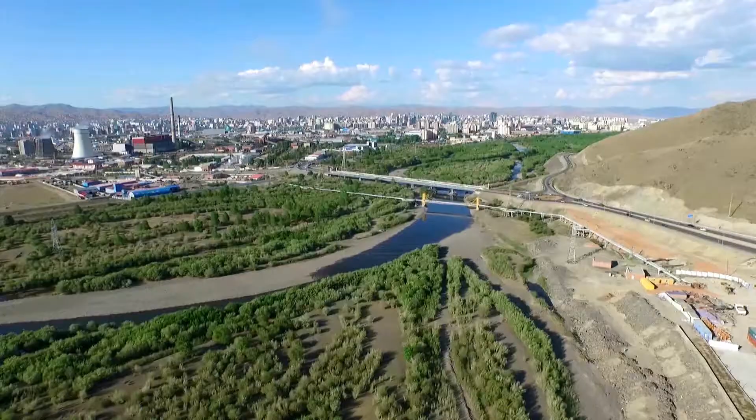There are over 20,000 enterprises and industries in Mongolia's capital Ulaanbaatar, the largest and most thoroughly developed place in Mongolia, as well as a population of more than 1.35 million. The Water Supply and Sewerage Authority of Ulaanbaatar is responsible for the constant supply of drinking water.

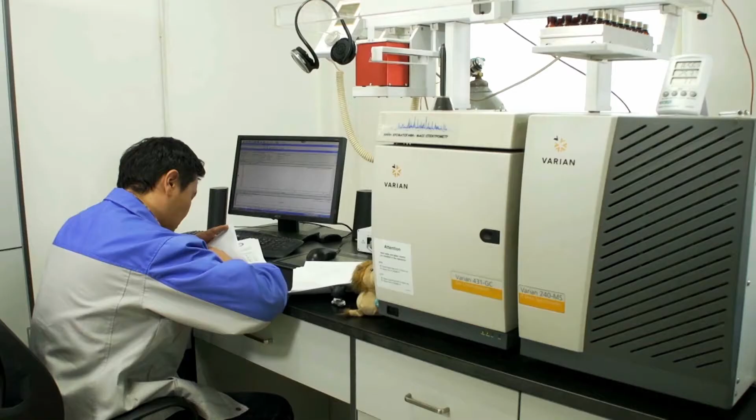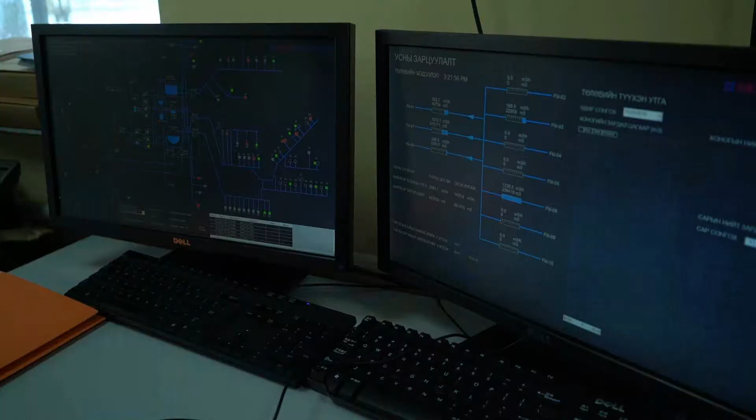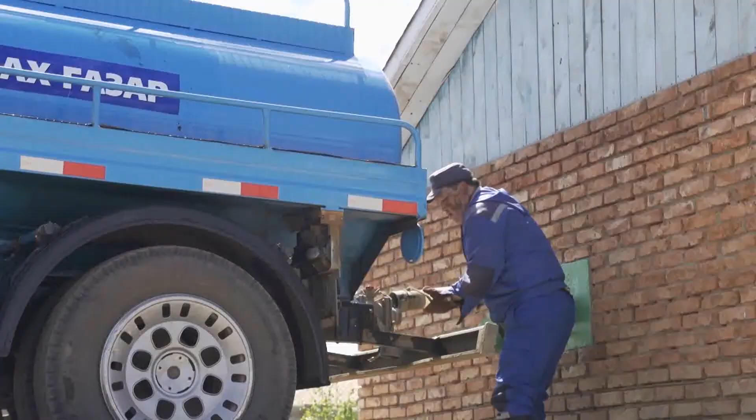The station pumped a total of 146,798 cubic meters. Alongside the Board of Directors, our activities are supported through the following structure: Director, Deputy Director and Chief Engineer, Deputy Director of Customer Service, Engineering Policy Department, Emergency Service Department, Technical Monitoring Department, Call Center, Customer Service, Contract and Monitoring Department, Economic, Finance and Accounting Department, Administration and Management Department, Investment and Procurement Department, Water Supply Utilization Division, Maintenance Division, Water Laboratory, Customer Service Division, Water Supply Pipeline Division, Water Supply Transportable Division, Water Transportation Auto Garage, Wastewater Treatment Plant Utilization Division, Industrial Wastewater Treatment Plant.

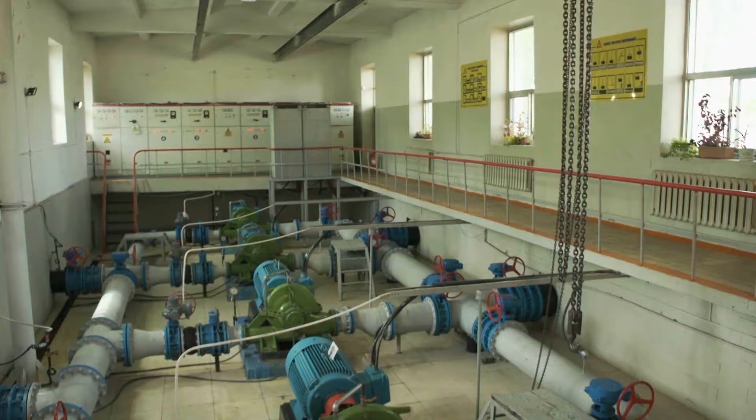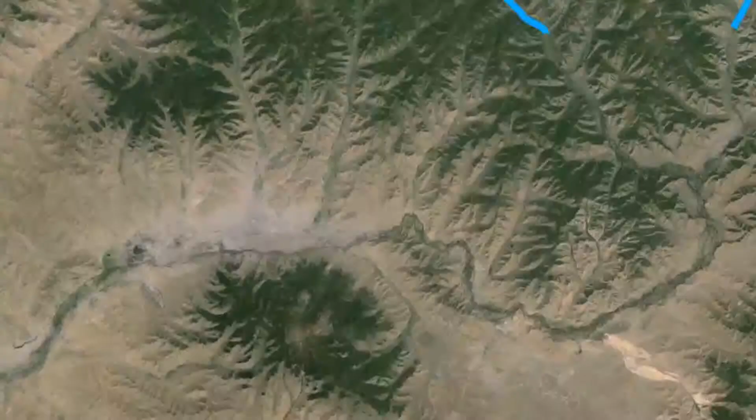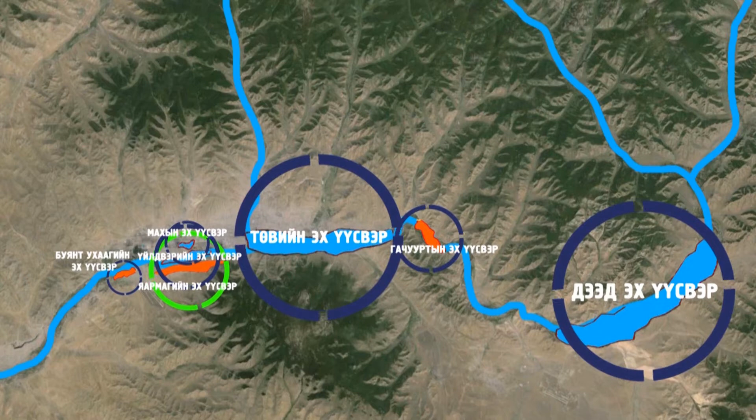The drinking and sanitation water for the populace of Ulaanbaatar is supplied by 7 main sources. These are the upper water source, the Gachuurt water source, the central water source, the meat water source, the industry water source, the Yarmag water source, and the Buyant Ukhaa water source.

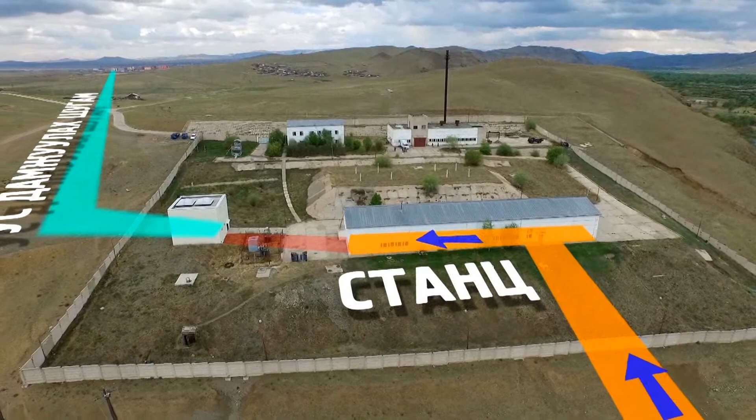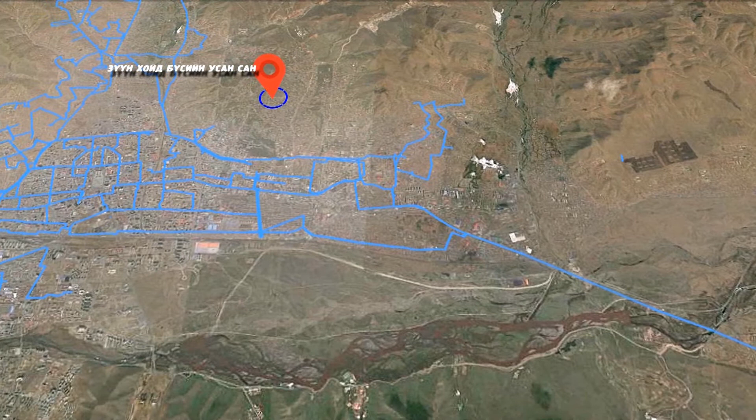Also, drinking and sanitation water is transported to customers in apartment and housing areas from 5 water reservoirs, namely the Zavsar, Northeast Zone, Tasgan, 3rd and 4th Region, and 21st Region reservoirs.

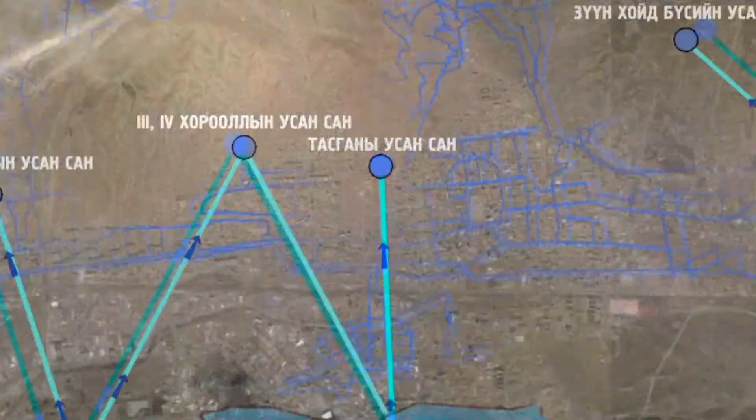Following the installation of water meters in all apartments from 2010, water consumption per person went down from 263.1 litres to 167 litres per day.

For the 60% of Ulaanbaatar's population that is accounted for by those living in the Ger districts, drinking water is provided by transported water stations and water lines.

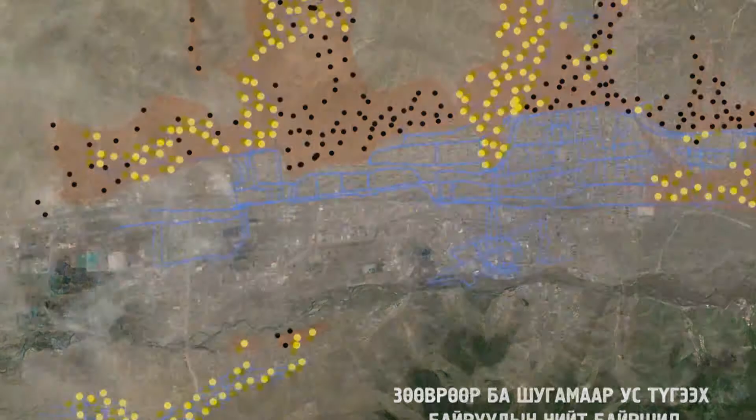57 water trucks bring drinking water to 278 water stations, servicing 226,433 customers.

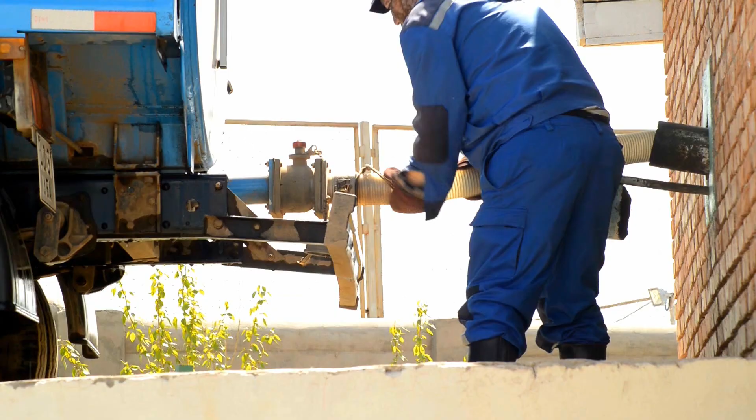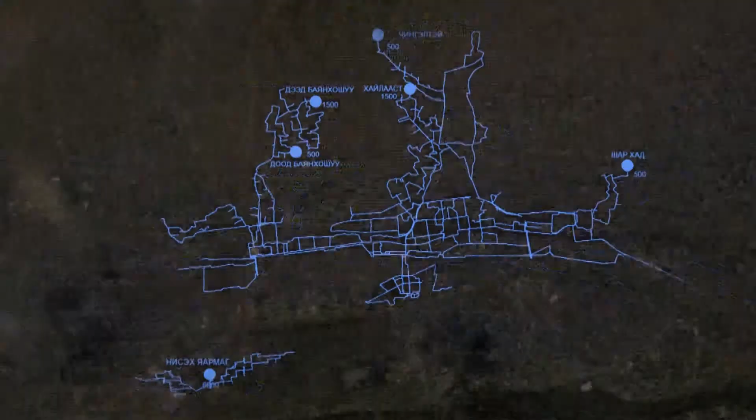In addition to this service, 240,394 customers in the Ger districts receive their water from the 318 water stations that are connected with water lines. Moreover, Chingeltei, Khailaast, Upper Bayankhoshuu, Lower Bayankhoshuu, Nisekh Yarmag reservoirs are sub-sources for 318 water-lined water stations.

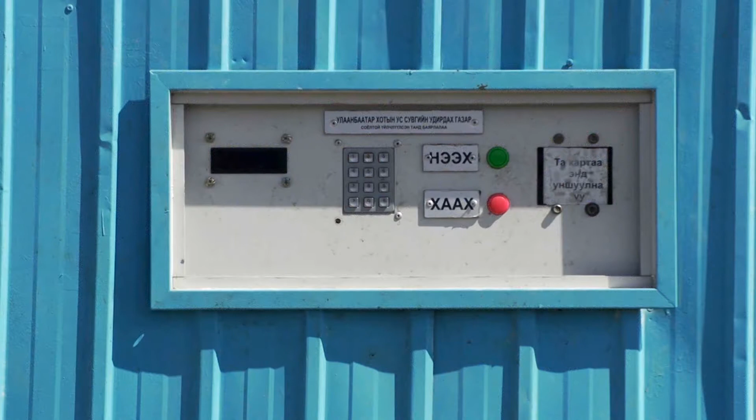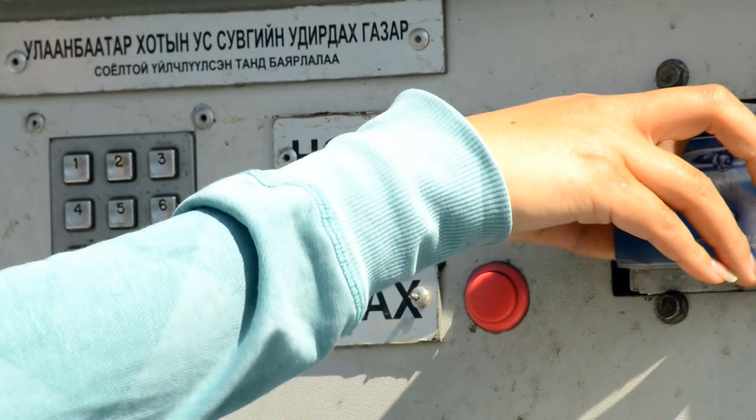According with the Smart Ulaanbaatar program, we have begun to establish smart water stations in order to support customers' water usage and maintain the continuous flow of water 24 hours a day.

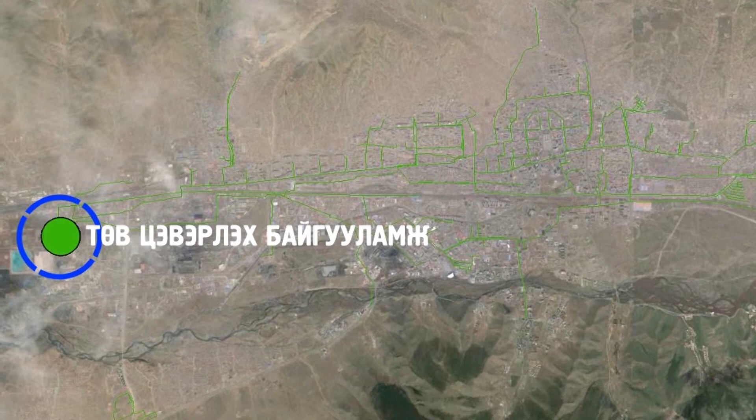The wastewater of Ulaanbaatar, comprising 150 to 160,000 cubic meters per day from apartments, Ger districts, enterprises and industries, is received through a 250-kilometer-long sewerage system to the central wastewater treatment plant of Ulaanbaatar.

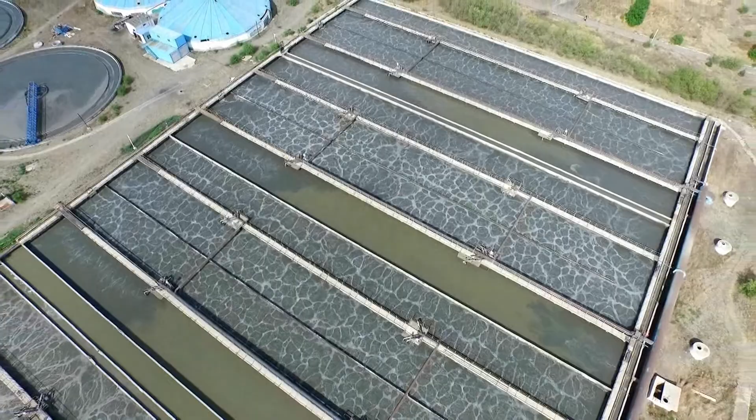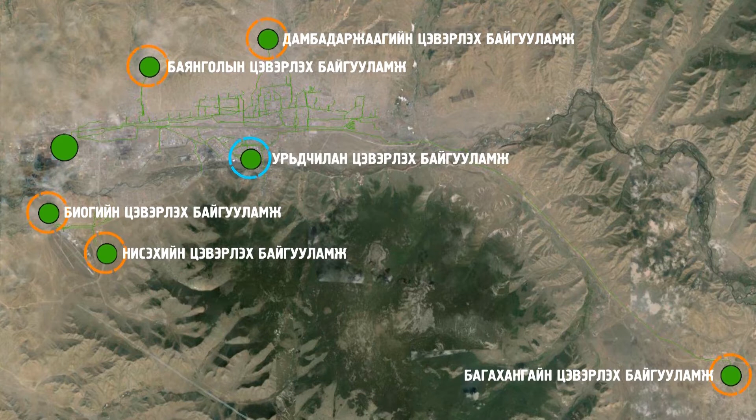There are 5 small-scale wastewater treatment plants: Nisekh, Bio, Bayangol, Dambadarjaa and Bagakhangai, as well as an industrial wastewater treatment plant which provide support for the central wastewater treatment plant in Ulaanbaatar.

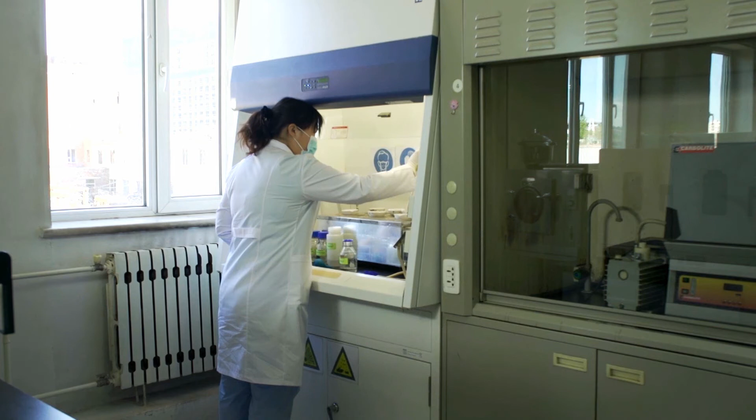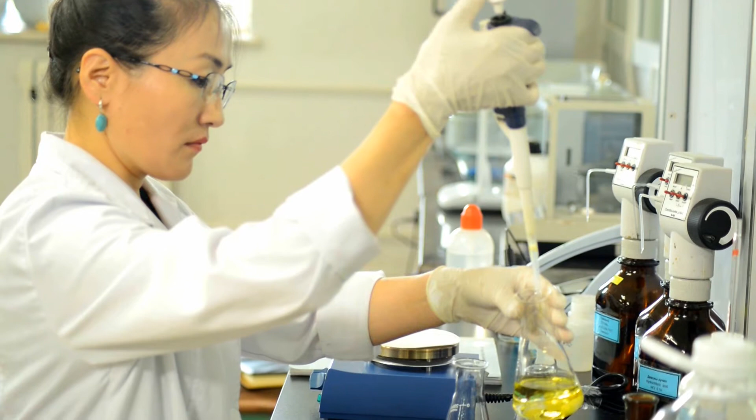We have a 50 to 60-year-old, 100mm to 800mm diametric, 586-kilometer long water supply system in Ulaanbaatar, through which city dwellers receive 150,000 cubic meters of drinking and sanitation water per day. Furthermore, our organization does chemical, physical, and bacteriological analyses subject to the Mongolian standard MNS 0900-2005 for drinking water.

Between 2011 and 2012, we built a sports complex and training center for the employees of our authority.

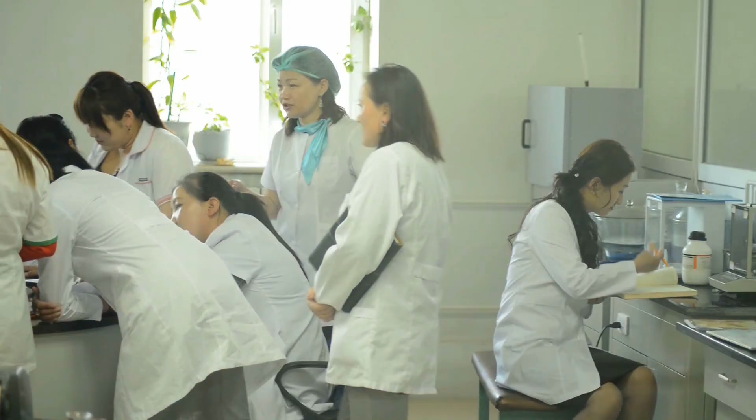The WSSA was established in 1959 and is comprised of a total of 6 departments, 7 divisions and 2 agencies, as well as a water laboratory. We provide wastewater treatment to the necessary standard that will ensure that the ecological balance of the receiving natural systems will not be adversely affected.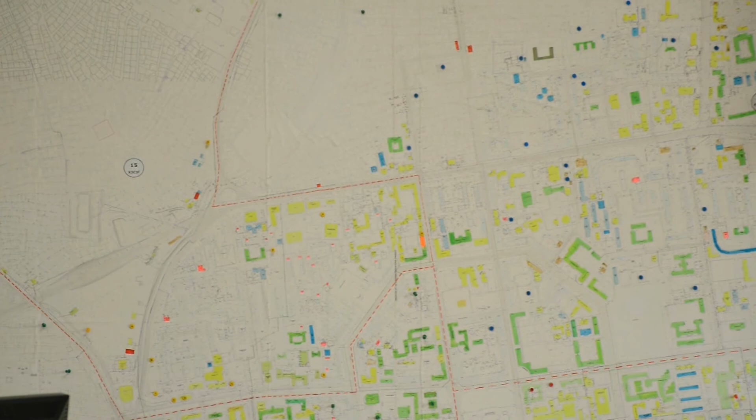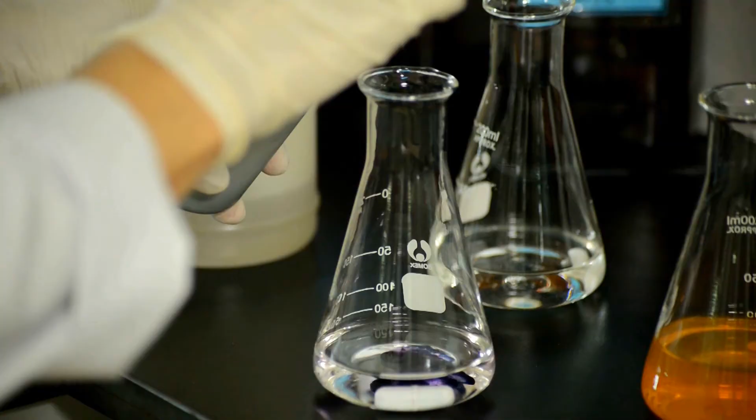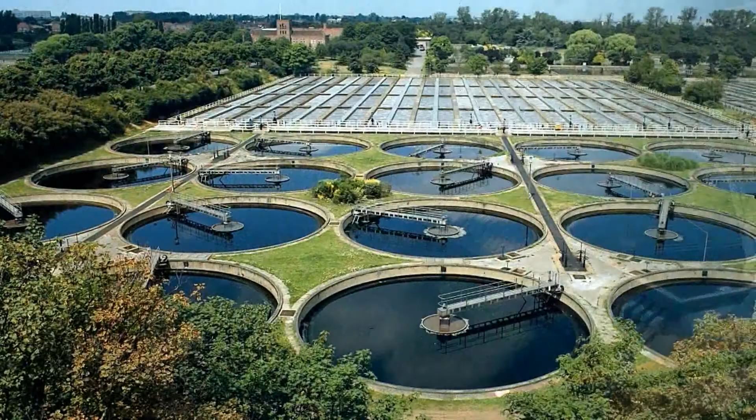We have been focusing on detecting water loss and wastage in Ulaanbaatar, and the Ulaanbaatar Water Security Plan, developed and approved by the City Council, has been accomplished. In the near future, we are working to implement 3 mega projects: the Tuul Water Complex, a 250,000 cubic meter per day capacity new wastewater treatment plant, and no-dig pipeline rehabilitation.

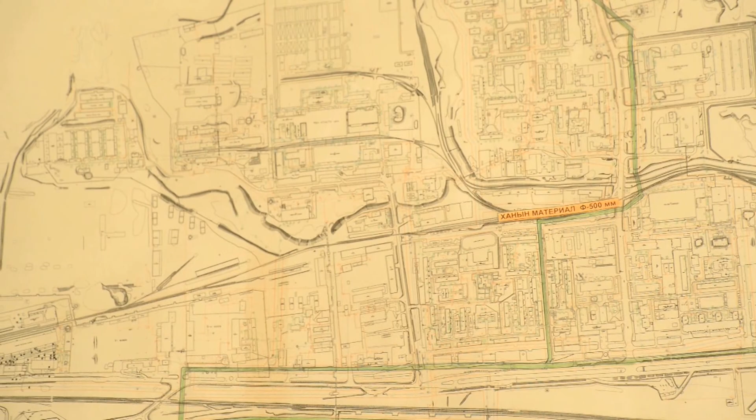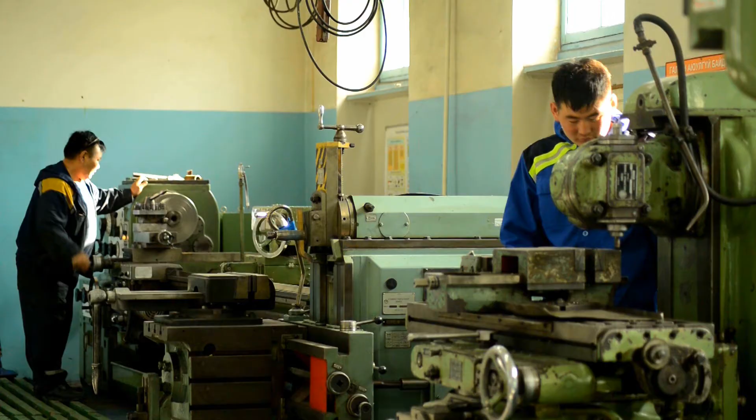Water is precious. Therefore, employees of the Water Supply and Sewerage Authority of Ulaanbaatar are dedicated to earning, through tireless effort and effective best practice, the continuing confidence of over 1 million citizens of Ulaanbaatar for the consistent supply of fresh water and the treatment of wastewater. We are proud to be able to work to guarantee a healthy lifestyle for all. May clear waters flow forever forth, bringing joy and life to all beings.